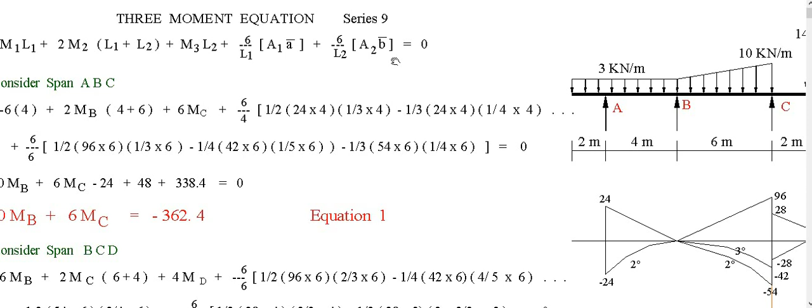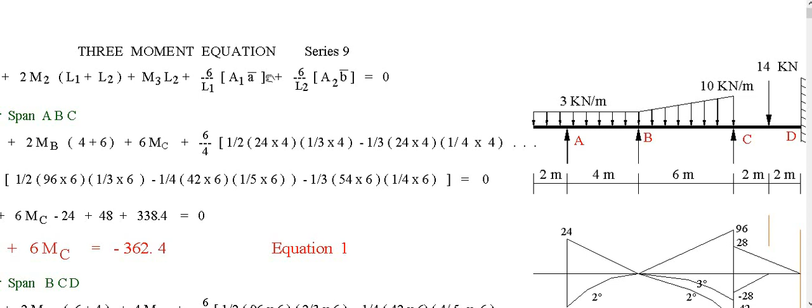We substitute, considering two spans at a time using this three-moment equation. We have moment at B, moment at C, and moment at D as the unknowns. So we have three unknowns, and we must have three equations.

The first equation comes from the first two spans, A, B, C. So we create one equation. The second equation is from two spans B, C, D. The third equation is derived from considering C, D, Y — an imaginary span on the right because of this fixed end. We must have three equations.

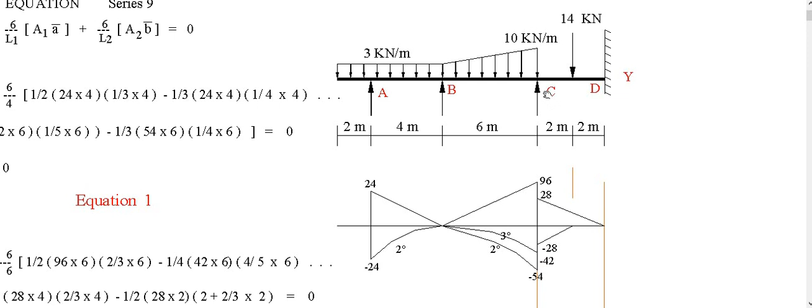So the third equation is derived from the span C, D, Y. Basically we will need this moment by part to solve the values. We consider the span AB, neglecting BCD and neglecting the overhang, just a plain uniform load of 3 on the span AB.

Consider it as a simple beam, so the reaction at A is 1/2 of 3 times 4, or 6. This is 12 divided by 2, equals 6. The reaction at A is 6, reaction at B is 6. The RA is not the real reaction, it is just a prop or temporary value of RA. Then RB is also 6, so we bring the moment of this reaction at B to the pivot at A: 6 times 4, RB times 4, or 24.

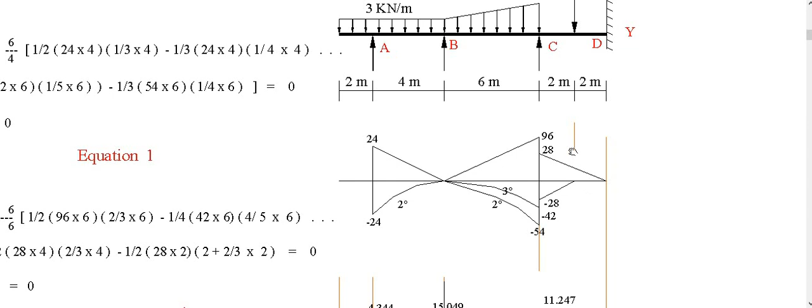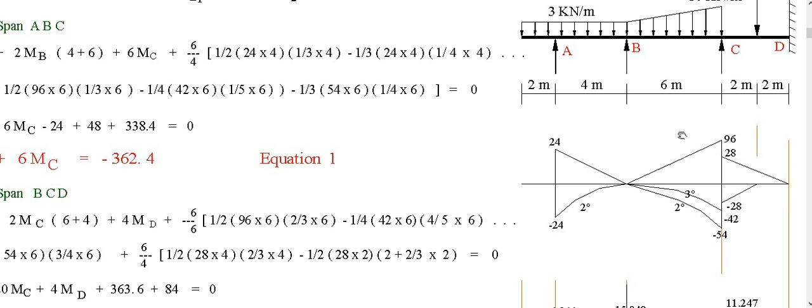You have to know how to solve this. This is just the moment due to the simple beam reaction that creates a moment. Then we need this to substitute into the constant of this moment diagram, moment by part on the left, and this one on the right.

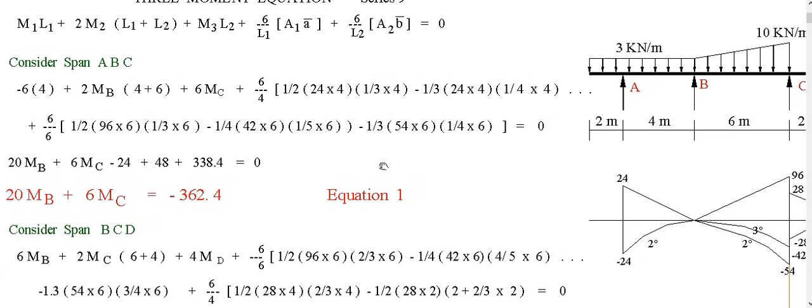So we begin with two spans ABC. We have to create one equation for ABC. Now the moment at A is not 0. The moment at A is 3 times 2 times 1, or minus 6. The moment at A is minus 6.

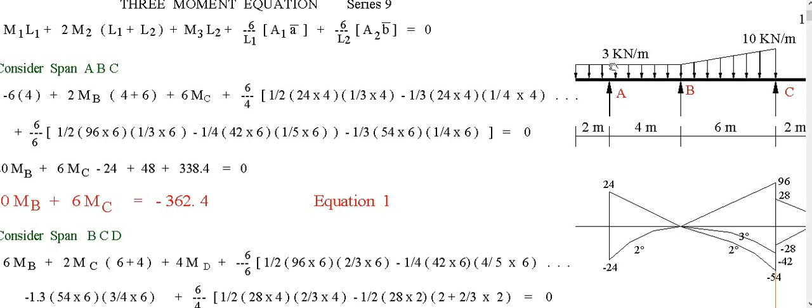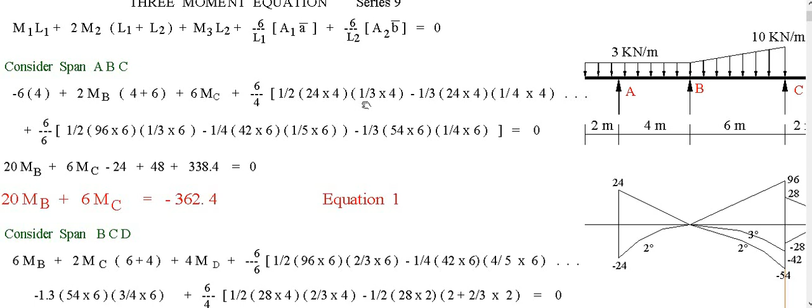So substitute from this basic equation: the moment at A is minus 6, then the span is 4. M1 L1 is minus 6 times 4. Twice the moment at the center of A, B, C, or moment at B. Then the distances L1, L2 are 4 and 6. Moment at C is unknown, then L2 is 6. So we have two unknowns, MB and MC. Then the constant of the moment by part is 6 over 4 L1, the area.

So 1/2 triangular 24 by 4 times distance of centroid from here to here is 1/3 of 4, minus the parabolic 1/3, 24 by 4, times from the left, 1/4 of 4.

Okay, the centroid from here up to here. You will notice that the distance to the centroid on the moment by part on the left, the origin must be on the left. On the right of ABC, this is the right portion of ABC or BC, the origin is on the right. Again, the centroid on the left must be on the left. The centroid here on the right must be on the right, or at C.

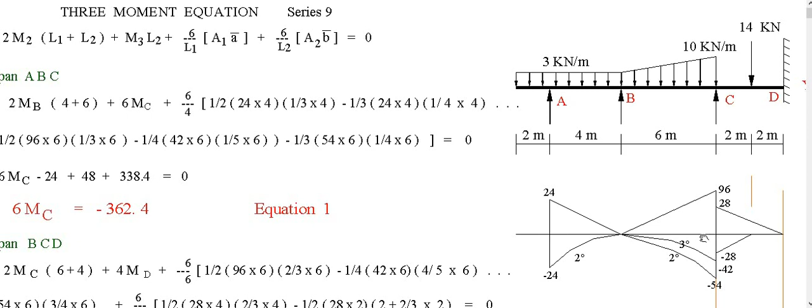So we continue this second part of the moment by part, or here. This is 6 over L2, or 6, times this triangle is 1/2, 96 by 6, times from the right, the origin is 1/3 of 6 from here to the centroid of this, 1/3 of 6.

Then here the lower portion, 1/4, this is for the parabolic, the third degree parabolic. So third degree, so we need 1/4, 42 by 6. Distance is 1/5 of 6 from here to the centroid of this third degree parabola, 1/5 of 6.

Then the lowest moment by part, 1/3, 54 by 6, so this area, times distance of 1/4 of 6 from here to the centroid of this, 1/4 of 6. Then equate that to 0, because there is no settlement. This problem does not involve settlement. So 0.

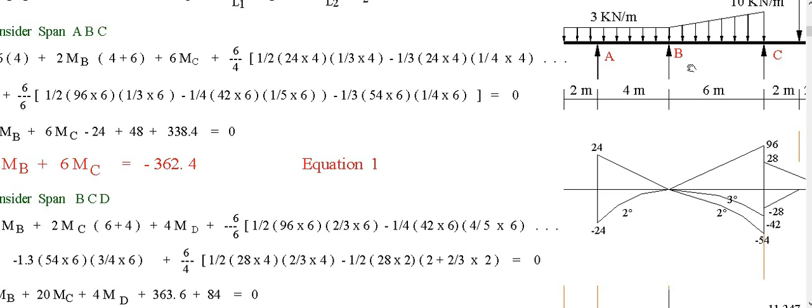Simply shows that moment at B must be negative, moment at C is negative. On the support, usually moment at the support is negative. So moment at B is negative, moment at C is negative, so adding these two negatives gives a negative. So you must check that this moment must be negative if the moment at the support is negative. So we have this equation 1, due to span ABC.

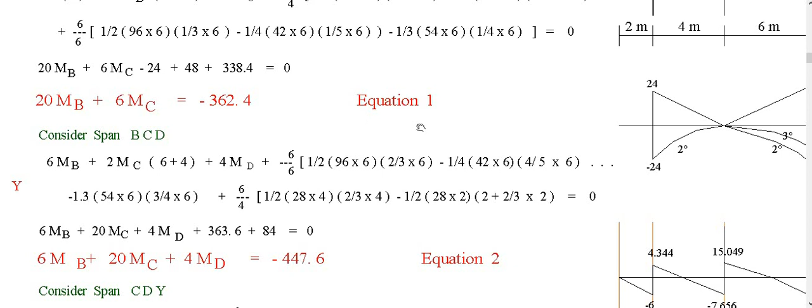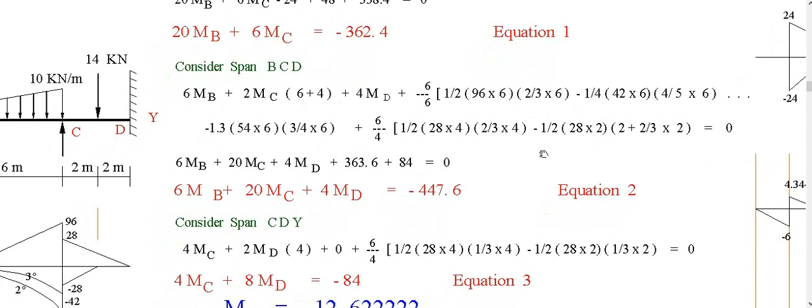Next we consider the span BCD. Okay, so we consider this figure, BCD. We need only BCD, so no need to consider AB. So I will move this to BCD. So these two moment by parts.

Consider always two spans at a time. So substitute to the basic equation the moment on the left, B, times 6, plus twice the moment on the center, or at C, center of BCD, twice moment at C, distance is 6 plus 4. Then moment on the right, as D, times the span of 4.

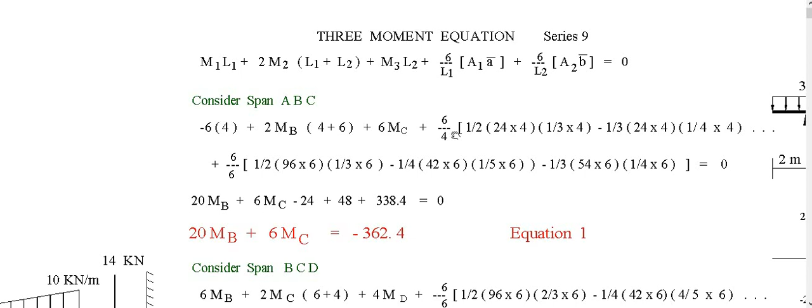Then the constant, this equation 6 over L1, 6 over 6 for the left portion, this left portion, 6 over 6, times 1/2, open bracket, 1/2, 96 times 6, times on the left, the distance on the left. Since we are considering BCD, this is the left portion, this is the right portion. So the distance must be from B to the centroid of this triangle, 2/3 of 6, 96 by 6, then 2/3 of 6.

The lower part, okay, this for the third degree, so 1/4, 42 by 6, distance from the left or B, so it is 4/5 of 6.

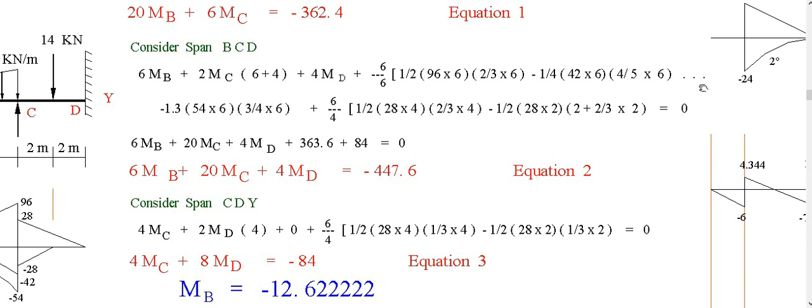Then continuing here. This 54 is 1/3, 54 by 6, times the distance from the left is 3/4 of 6, from here to the centroid of this, 3/4 of 6.

Then on the right of BCD or CD, this figure moment by part is 6 over 4, 6 over L2, 4. Then the area is 1/2, 28 by 4, times the distance must be on the right, so 2/3 of 4 to the centroid of this triangle. Then the lower portion is 1/2, 28 by 2, times the distance from the right, 2 plus 2/3 of 2.

Okay, and equate that to 0. Simplifying this is 10, 6 MB, moment at C, 10 times 2 or 20 MC, then 4 MD.

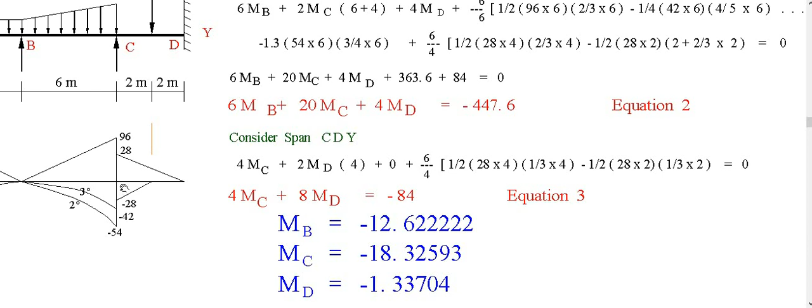Then the constant of the moment by parts, this one, is 6 over 4, 6 over L1 or 4. Area is 1/2 times 28 by 4, times the distance from the left which is 1/3 of 4, minus this lower part which is 1/2 times 28 by 2, times distance of 1/3 of 2. Then equate that to 0.

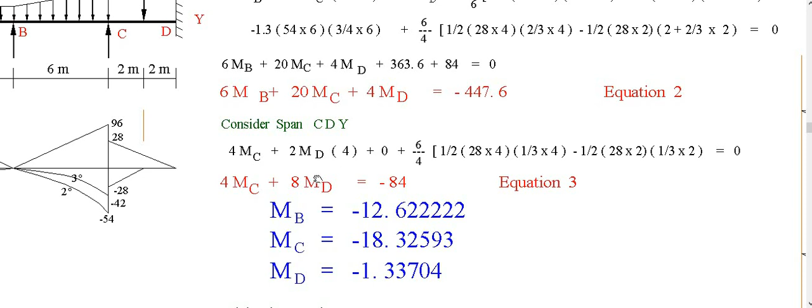We have no settlement on this beam. So simplifying this constant, we have only one constant, and it is positive. Transfer that to the right, it becomes negative or minus 84. Copy this: 4MC, 8MD, then the constant is minus 84, and this is equation 3. So we have equation 1, equation 2, and equation 3.

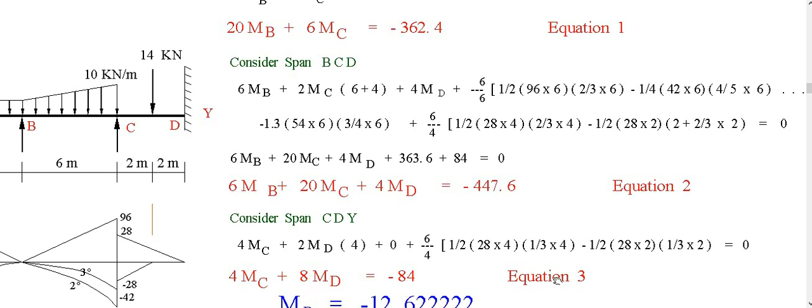Solving this by simultaneous equation, we have these three values using your calculator. In calculator, this is automatic.

So moment at B is minus 12.62222. Moment at C is minus 18.32593. Moment at D is minus 1.33704.

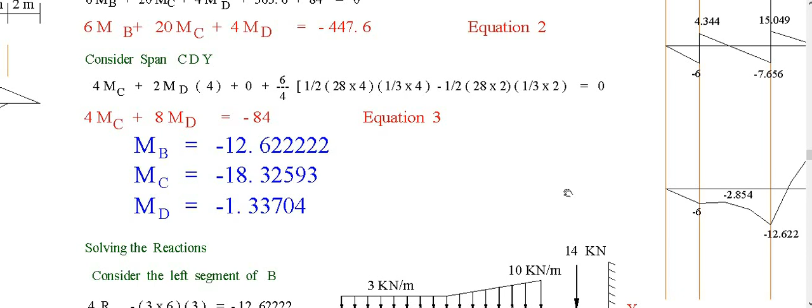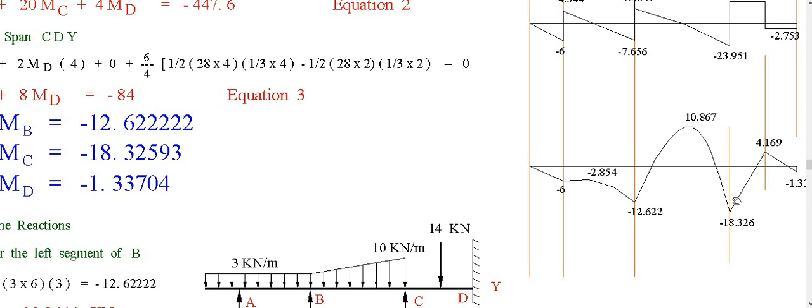So when plotting the moment diagram, place first the moment at A. The moment is minus 6. Moment at B is 12.622. Moment at C is 18.3259, and moment at D is 1.337. This is the moment by moment, and this is the shear.

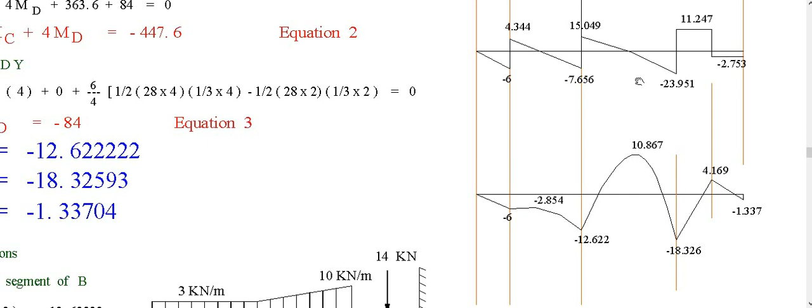Okay, we will solve first the reaction. Consider this span. Cut section here, on the left of B. When we cut, consider this portion only. Do not consider the right portion.

Actually, the moment at B on the left is equal to the moment on the right. So the moment at B left, due to this reaction and uniform load, this is the moment on the left. Moment on the right must equal to the moment on the left. So moment on the right is given as moment at B, 12.622. Okay, moment on the right is 12.622. Moment at B direction is clockwise, while the moment on the left is counterclockwise. If we add these two, the moment at B must be 0.

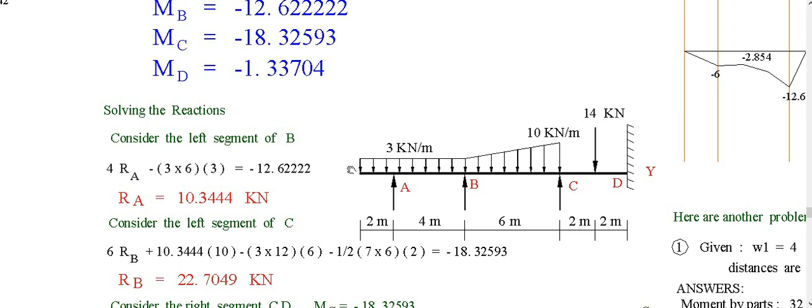So sum up all the moment on the left, this one, must equal to the moment on the right, this one, 12.622. The moment on the left is RA times 4 minus 3 times this whole thing times 6. 3 times 6, the center of 6 is 3, and equate that to minus 12.622. Solving for RA, we get 10.344. We have only one variable, so it's simple to solve for the RA.

Then to solve for RB, we cut section on the left of C. Again, the same explanation: the moment on the left, due to all forces on the left, is equal to the moment on the right, which is moment at C, 18.32593. This one, moment on the right is 18.32593.

The moment on the left, here are all the forces on the left, so it is equal to reaction R at B, unknown, times 6, plus the reaction A which is 10.344 times distance of 10. Then uniform load minus 3, just continue this 3 times distance of 12. 3 times 12 times middle of 12 is 6, the distance at the center. Then the triangular part, we have 10 minus 3 is 7, 1/2 times 7 times 6 times 2. 1/3 of 6 is 2, and equate that to minus 18.32593.

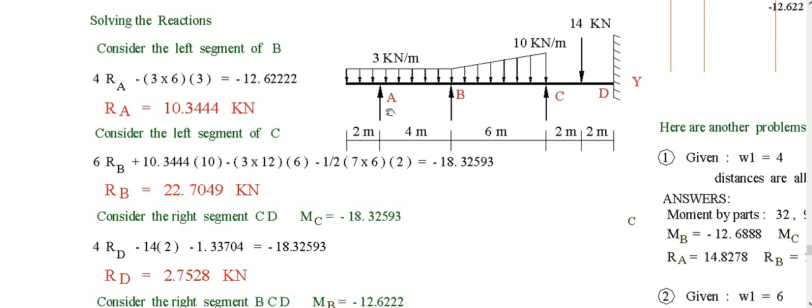Then, okay, RA and RB are now solved. These are the real reactions, RA and RB. Then solving for RD, we cut section looking only on the right of C, or CD.

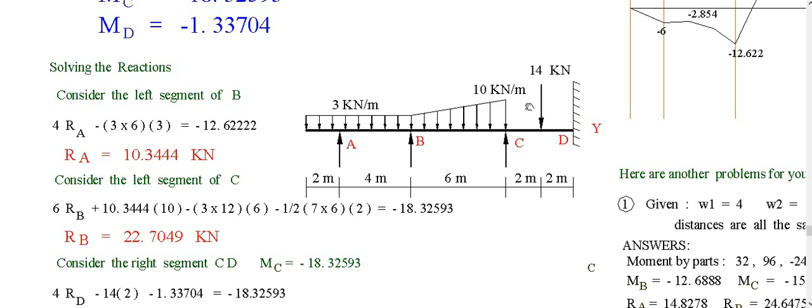The moment at C is 18, the same as this. The moment at C is 18, and the direction of that moment on the left is counterclockwise. And there is also moment at D, and it is clockwise. Moment at D is 1.33704. So at CD we have two moments: moment at D, 1.33 here, then moment at C as 18. This is 18.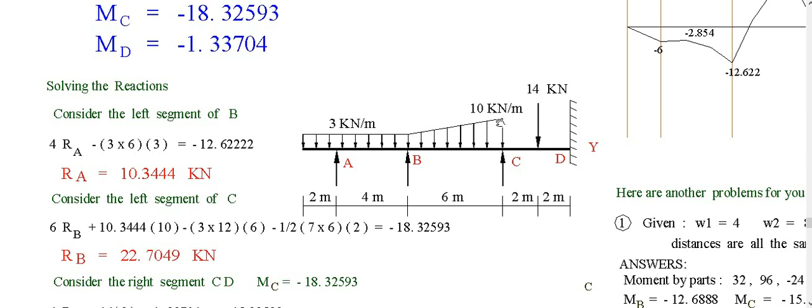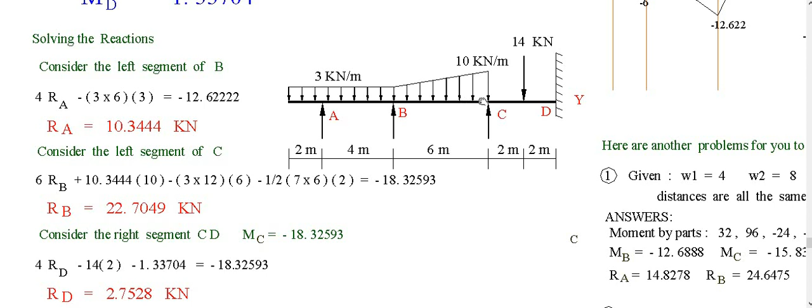Moment at C. So the direction of the two moments are opposite. This is clockwise moment at D, here counterclockwise moment at D. They are opposite in direction of the moment.

Okay, so moment at C is equal to 18 here. We sum up all the moments on the right equal to the moment on the left at C. Moment at C is 18, this one. Moment counterclockwise, moment at D is clockwise.

So solving for RD: 4 times RD minus 14 times 2. Okay, this is minus. RD is plus here.

Then moment at D is clockwise, the same direction as the 14. This is clockwise with respect to C. Moment at D is also clockwise. So minus 1.33704, the moment at D, and the moment at C on the left.

Moment here on the right of C, this 3, is equal to the moment on the left, minus 18. 32593 moment on C. Moment at C is this.

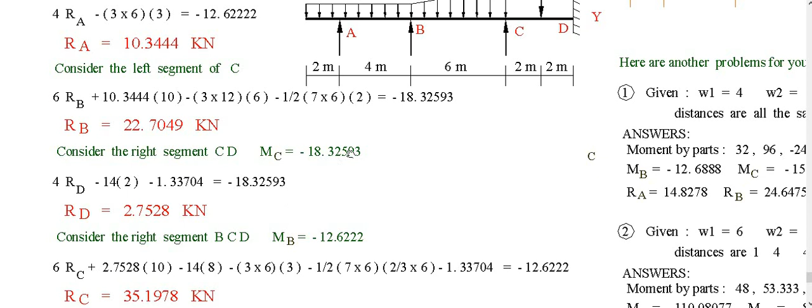So again we have one unknown, one variable. Then solving for RD, it is 2.7528. It is positive, not all of the time. Oftentimes positive, but sometimes this is negative depending on the loading. If this is too big, this will curve that way, so it will lift. But this is positive, okay.

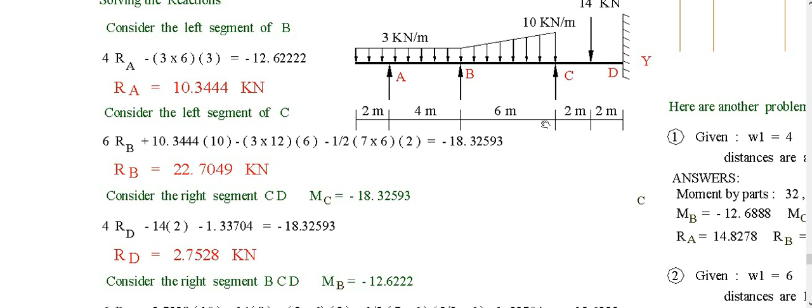Now, given we solved RB, solved RD, we have only one left. We have to solve RC. Consider BCD. Okay, consider BCD.

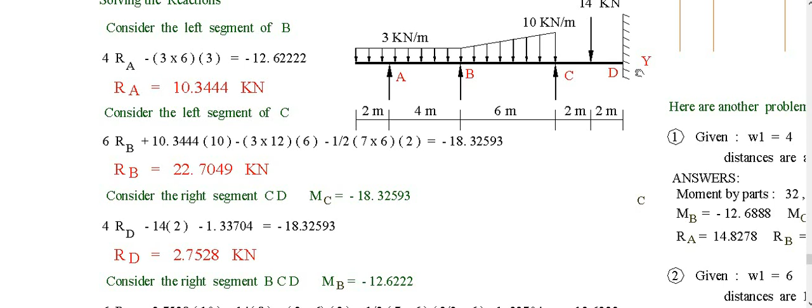Then look only at the figure on the right of the cut section at B. The right portion, we have this unknown. So cut section here, there is a moment at B left. This is also moment at D. Here on the right, moment at B, here.

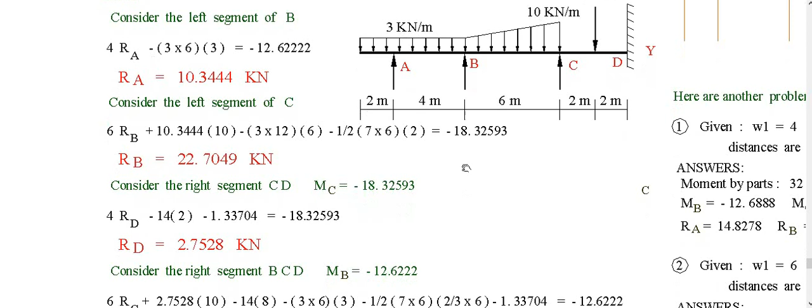So solving for RC times 6, plus RD, 2.7528, times 10. This is 10, minus 14 times 8. 14 times 8. I have to move this.

I have to move this.

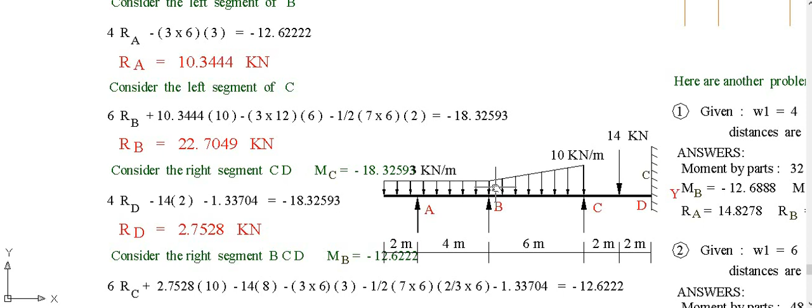Again, 6 RC, unknown RC, 6 times RC, reaction at D, 2.7528 times 10. This distance is 10, minus 14 times 8. Distance is 8.

Triangular, rectangular. This is 3 uniform load, rectangular: 3 times 6, times 3, 1/2 of 6, 3, times minus the triangular. 10 minus 3 is 7, so this is 7, 1/2, 7 times 6.

Then distance triangular, 2/3 of 6. We take moment at B, so 2/3 of 6.

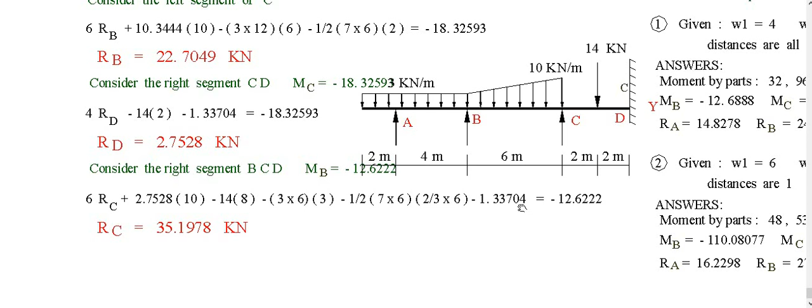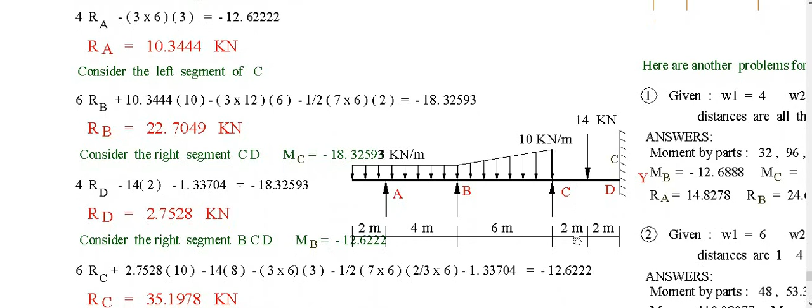Then there is a moment on D of minus 1.33704. This is the moment at D, 1.33704. Then equate that to the moment at B as 12.6222. Then again we have only one unknown, RC.

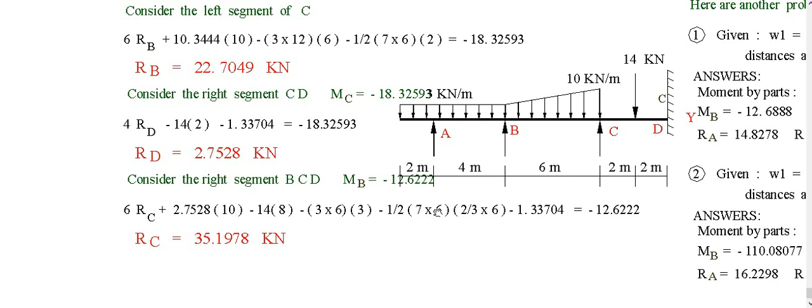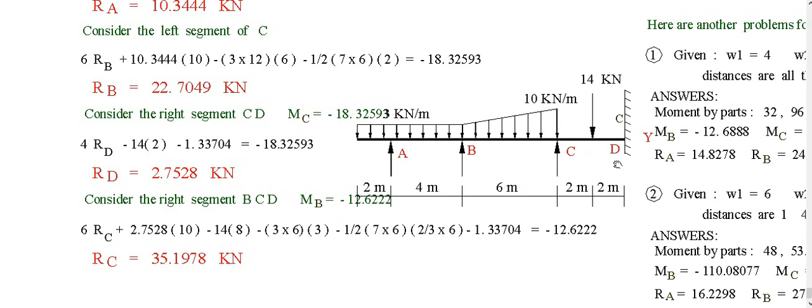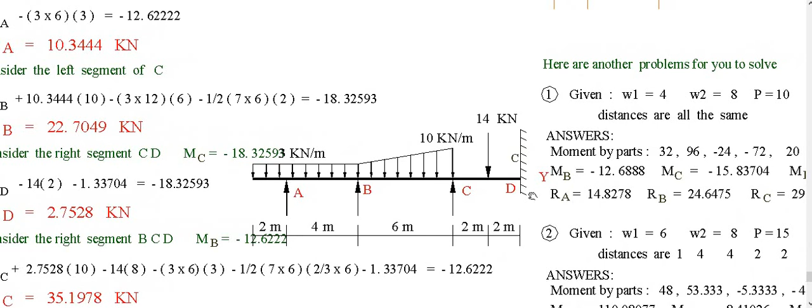Okay, RC is 35.1978. So we have now solved the 4 reactions RA, RB, RC, RD. Now we have also solved moment at B, moment at C, moment at D. Three moments given, we can solve now the shear and moment diagram.

Due to the forces, we have the shear. This. It must close. The forces must close back to 0. This is uniform load going down.

Then the moment we have listed before, moment at this portion is minus 6. Okay, then minus 1.333. Shear and moment.

This discussion about these values is under the topics of strength of materials, so I will not discuss this anymore, and I will leave this to you to solve or check this.

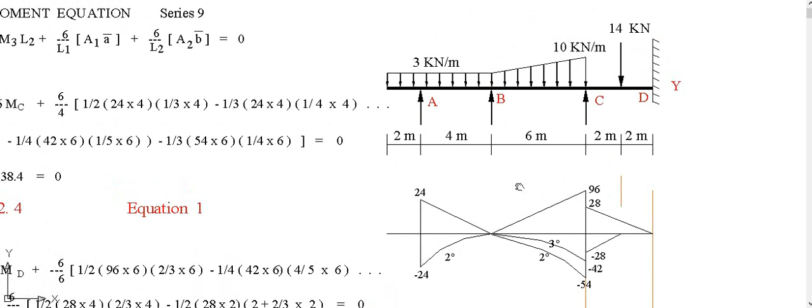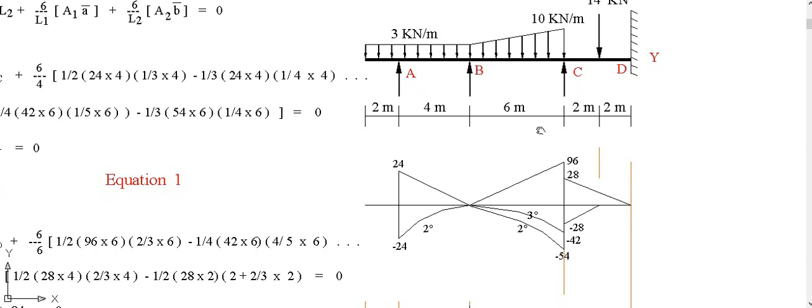Then this will end the discussion on the tutorial of this problem, series 9. This is the 9th lecture for the three-moment equation. I hope you understand this. It will help you a lot.

Then, to challenge you, I have made another problem, two problems. The given: you change, instead of 3, the moment W1 is 4; the W2 instead of 10, W2 is 8; and P instead of 14, make it 10. Then all distances of 4, 6, 2, 2 remain the same.

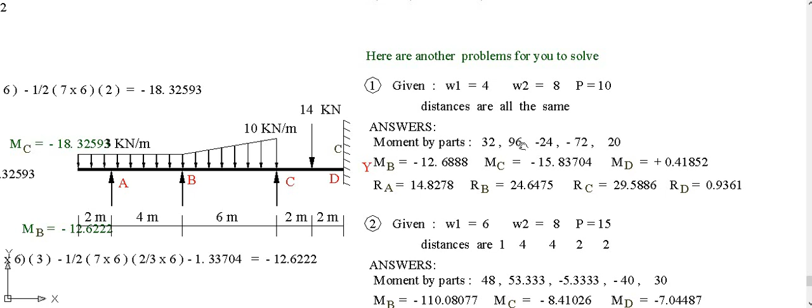Then we have the answer, the moment by parts. This moment by parts are this. Okay, moment by parts.

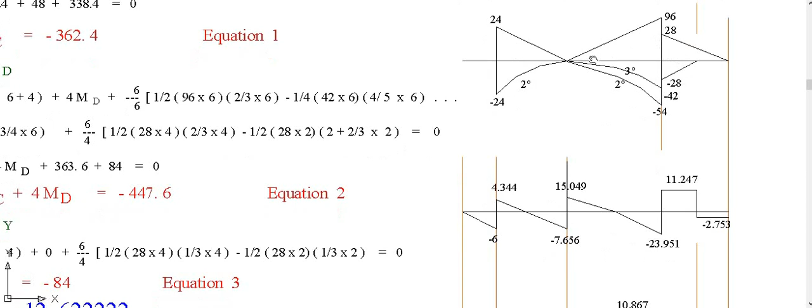Then the three moments solved: moment at B, moment at C, moment at D. Here the moment at D is positive. Different loading, moment at D is not negative anymore, it is positive.

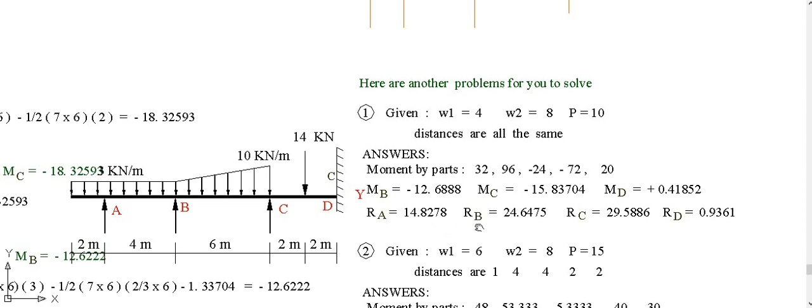Then the reactions are RA, RB, RC, RD. The reaction at D is very small, 0.93, because the moment at D is very small.

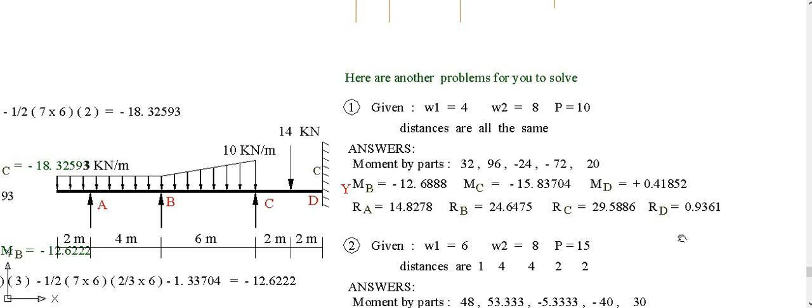Then we have another problem, the second problem, that will challenge you to solve on your own, to practice. Now take note, the distances are now changed: instead of 2, it's 1; instead of 4, the same; instead of 4 here, 6 here, it is 4; then 2, 2. Change the distance. Then we have these answers.

Okay, this will end our session on the lecture, the 9th lecture.